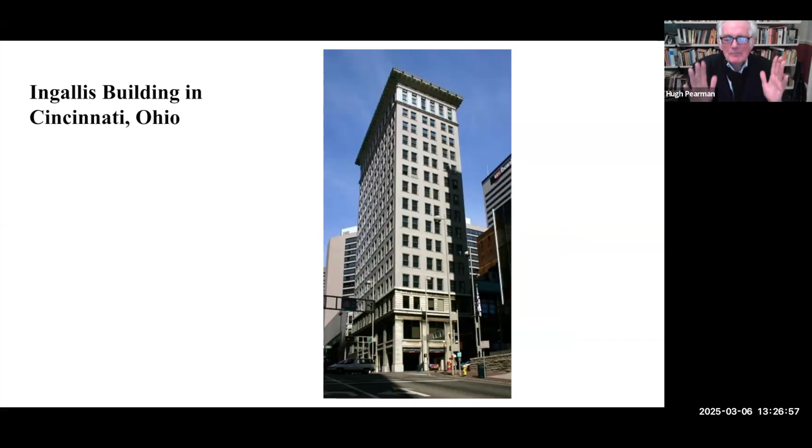It is mass concrete poured over, this would be steel, probably steel at this point. It should be at this date. So mass concrete, 21 semicircular spans, each 50 feet wide. The whole structure stretches 416 yards.

Concrete was used here because that was the only really available building material. The local stone was too hard to use. So this was a choice of material based on the economics and the nature of the site where this thing was being formed. What's interesting about this concrete is that it's poured, mixed with an aggregate, into a timber formwork, resulting in a material strong in compression, but not strong in tension. So I'll come on to that in a moment.

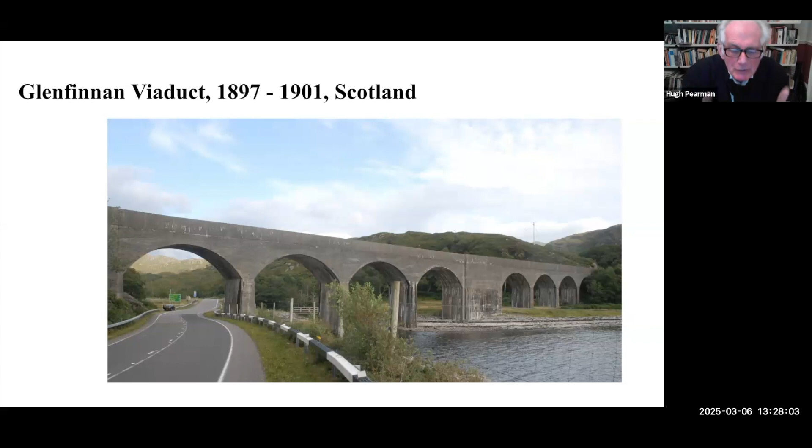So now let's think. The relation between materials and means of construction and design was a balancing act. The aim was to achieve speed and economy of construction and solidity, and of course, the required function of utility. And in bridge design, if not in viaduct design, near the top of the list of demands was almost invariably a maximum width of span between supports.

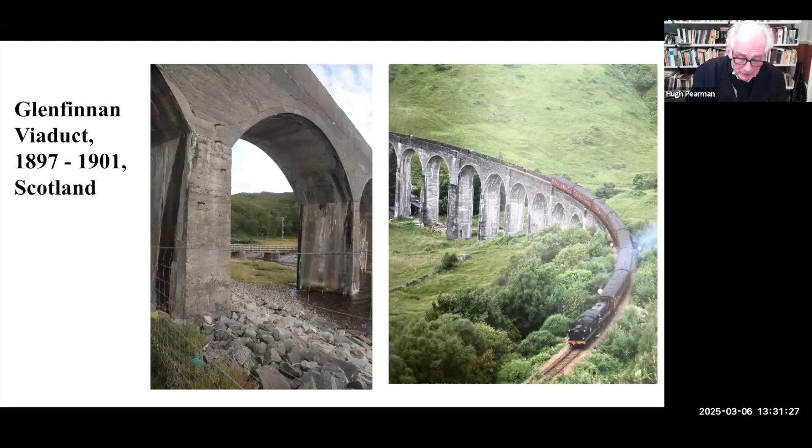But it was soon apparent that it was best if these materials, with their differing structural characteristics, were combined to offer the best of both worlds. Metal reinforced concrete is an expression of this approach, I suppose, isn't it? As is Brunel's use of brick in the Maidenhead Bridge. Brick is a material strong in compression, but given additional strength by Brunel through well-calculated design. So the bridge's span possessed a scale usually only achieved by the use of material with great tensile strength, like

wrought iron ribs. Another good example of the combination of materials with different structural characteristics is the Palm House in Kew Gardens in West London. It represents the emergence of wrought iron as a significant architectural material. The Palm House was built between 1844 and 1848 with the initial design by architect Decimus Burton, but ironmaster Richard Turner was the primary creative force.

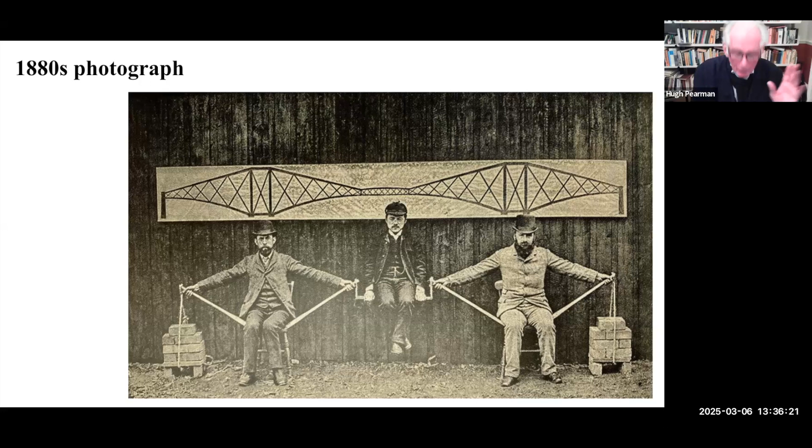Four years later, Sullivan expressed the essence of this aesthetic theory. I quote him again: "It is the pervading law of all things that form ever follows function. This is the law." So here is the simple truth. When form faithfully follows function, a powerful beauty is achieved. Arguably, this explains the visual power of such great bridges as that Firth of Forth, the old moral analogy between truth and beauty.

An applied or superficial ornament, when it does not relate to structure or materials, becomes irrelevant. This theory was well established. A.W.N. Pugin's aphorism of the 1840s, coined when he was promoting Gothic or pointed architecture, is appropriate. As Pugin wrote, all ornament should consist of enrichment of the essential construction of a building. Ornament that was harmoniously conceived and well considered could be beautiful when it was part of the surface or substance that receives it rather than looking stuck on. This gets to the essence of the aesthetics of good bridge design.

Now, into the brief case studies. Iron Bridge in Shropshire, on the border of England and Wales, crosses the River Severn. Started in 1777, opened in 1781, the first major bridge in the world made using cast iron as a structural material. Designed by an architect called Thomas Pritchard, constructed by ironmaster Abraham Darby III. Longest span, you see here, 100 feet.

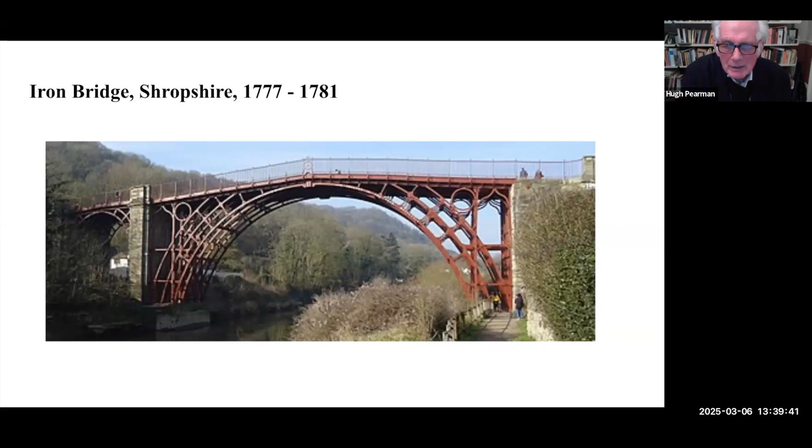The interlocking rings are interesting. You look at the center section. They make the trusses well. They connect the five arches to make it a truss arch bridge. So loads are being transferred one to the other. And Pritchard and Darby, of course, knew that cast iron works best in compression. So the structure is designed as far as possible to transmit loads vertically. So individual components are in compression.

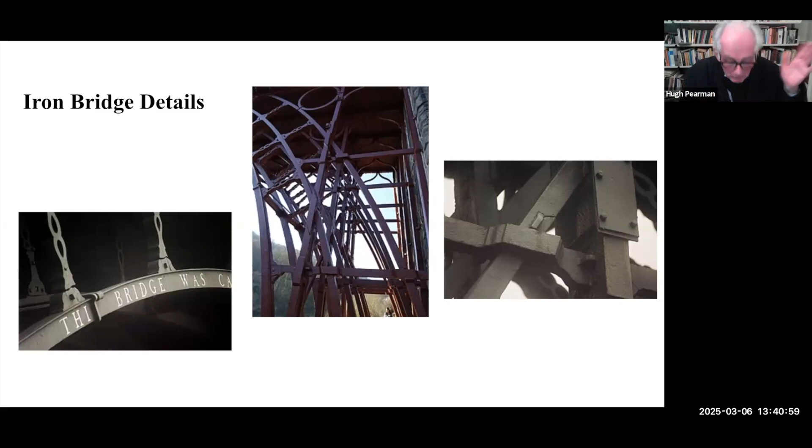place. So it's a component structure, not mass-produced components, because they're mass-produced in a sense, but then they're tailored to the site, delivered to site, and produced, raised into position, wedged together by using these carpentry techniques and so on and so forth. Really very, very interesting.

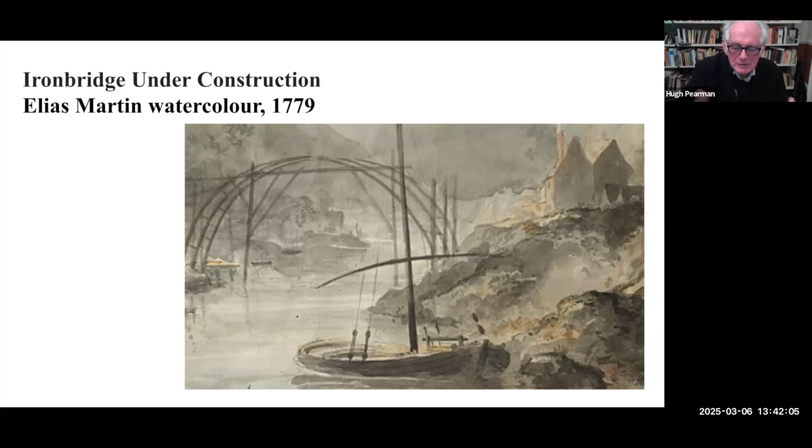So the next image is Southwark Bridge, the City of London. An astonishing bridge as a private toll bridge. Interesting how the Thames was crossed. This is right connecting the ancient City of London on the north bank with the south bank here. We're on the south bank looking towards the city churches.

A private toll bridge. It was a speculation. It was a business venture. You build a bridge and then try and make money by charging people to cross it. That's another whole fascinating story. It didn't really ever work quite well. These bridges were often quite deserted because people would choose other bridges that were often free to cross. Never mind.

An act of Parliament in 1811 gave the developers power to build this bridge, constructed 1814 to 1819, designed by the great John Rennie, one of the great engineer architects in Britain operating in the early 19th century. Had 3 spans of cast iron rising from granite piers.

So, as I mentioned before, spans are important, wide spans. These are the widest spans ever achieved with cast iron, as it happens. So he crossed the Thames and the roads each side in 3 spans. Only 2 piers were needed. That was a big deal at the time.

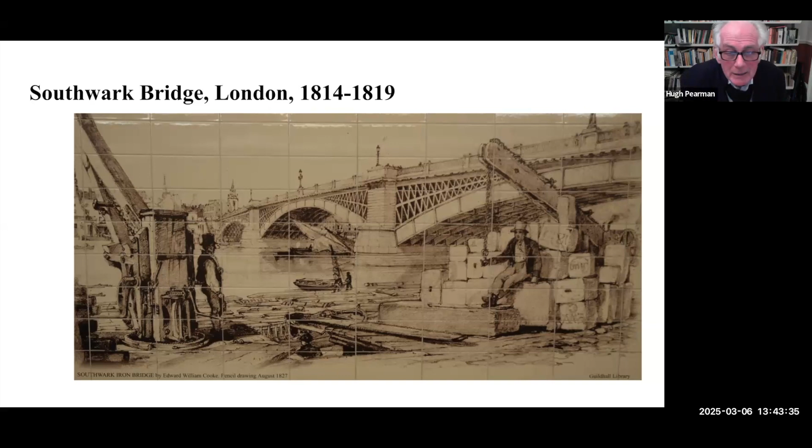And the spans worked. Cast iron, as I say, is strong in compression, but these obviously have a lot of horizontal loads. But it was well calculated. It did not fail. The bridge lasted for 100 years. Its narrow width proved its undoing in the end; there were no structural failures. So a really, really interesting example of a successful cast iron bridge. They were not all successful.

As I mentioned before, there were these epoch-making calamities. But being the 19th century and engineers being robust people, they didn't collapse. Generally, they learned from the disasters and improved their designs. Here we see the Dee Bridge disaster illustrated in a publication in the mid-1840s.

It was in Cheshire, designed by Robert Stephenson, one of the great heroes of the 19th century railway age. His father, George Stephenson, had been a pioneer of the design of locomotives. In the 1840s, his son was one of the big figures in the industrial age, particularly in bridge design and in railway design generally. But Stephenson did not, it seems, fully grasp the structural limitations of cast iron. It was a new material, and one can understand that.

This bridge, a railway bridge, obviously, you see from the debris it was carrying a railway when this disaster took place, railway carriages. It was made from cast iron girders of I section profile, so like the capital letter I, with the larger flange at the bottom to support the timber sleepers on which the track was placed. A nice idea, designing this I section, so it has a double function, carries the spans and also supports the decking for the tracks.

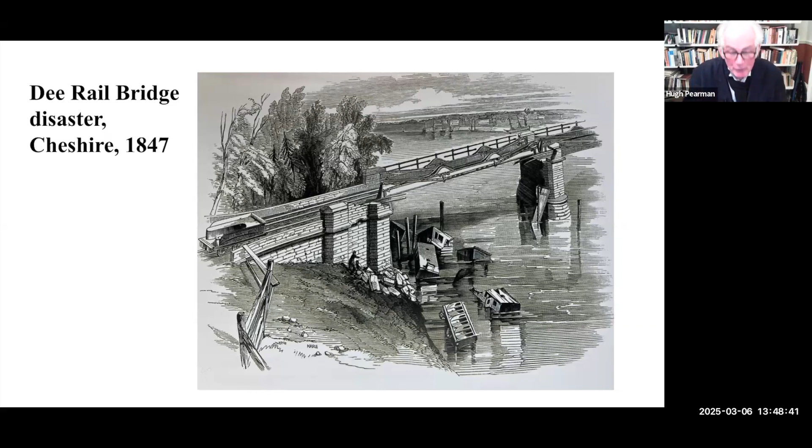While the reputation of Robert Stephenson was being severely challenged by the partial and fatal collapse of the Dee Bridge, he was working on the construction of the High Level Bridge in Newcastle that also made much use of cast iron. Design work had got underway in 1845. It must have been 1847, a highly stressful time for all involved. Cast iron under the microscope seemed to have failed, partly due to the design of the engineer of this bridge, Stephenson. What was to be done?

The bridge is sensational, by the way, the High Level Bridge in Newcastle. Cities of bridges. New York's a city of bridges. Newcastle is a city of bridges. You travel from south to north and north to south over the Tyne through the centre of Newcastle. You're given a display of the most sensational 19th and 20th century bridges in a row, all telling different stories. This bridge is a two-tier bridge, so it's vehicles and pedestrians on the lower level, on the top trains.

This two-tier bridge becomes a standard solution. Several examples, of course, in New York, they're much later. The Washington Bridge is the 1920s, I think. But here is this principle. High level because the railway comes in at a higher level than the surrounding streets. So these massive piers are built and the trains sail through the city.

The promoter of this bridge was a man called George Hudson, the railway king, an amazing character. Eventually became bankrupt and revealed to be a fraud, but that's again another story. It was to be the engineering showpiece of the route Hudson was promoting, connecting London and Edinburgh. Total length of 1,337 feet and rose 120 feet above high water level on the Tyne.

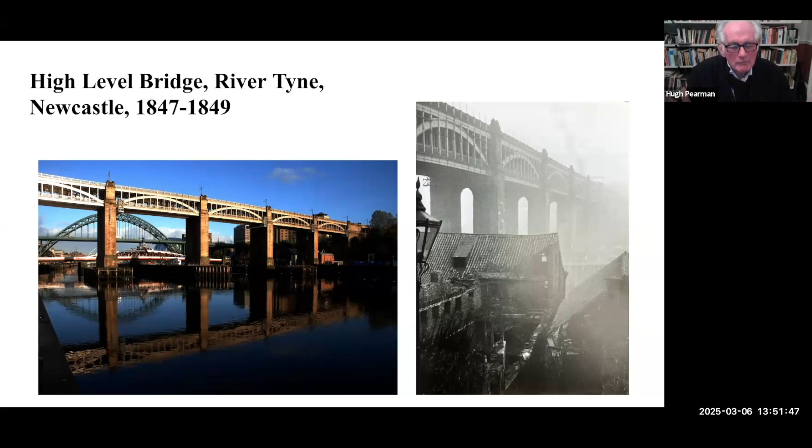So that is simply because the arches are very strong, but they have a lateral push outwards, and they could topple the piers, but the wrought iron tie bar anchors the ends of the arches and means they do not press outwards. And cast iron is okay here because the weight of the trains above the crown of the arch means it's operating in compression.

This is where you see one of the examples. So the bowstring arch, there's the arch, cast iron, in compression, the weight of the trains on the top, and you can't see it, but the ends of the arch are tied. So stop it spreading and stop it exerting outward thrust on the masonry piers each side.

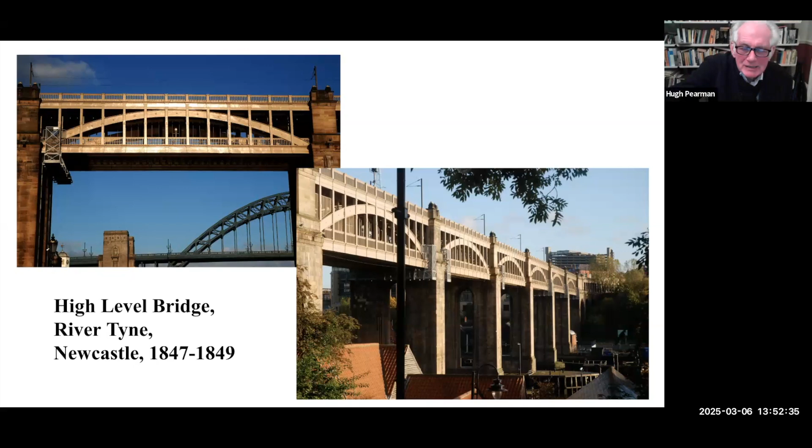Well, it's a beautiful thing to experience, to visit. If you ever in England have time on your hands, go to Newcastle. You walk through this tremendous wonderland of mid-19th century engineering. You see some of the details. I think the next image gives you a little hint of what you see.

So the lower, on the left-hand side, you're walking along the pedestrian route and the vehicle route. Above you are the trains. All that is cast iron. These wonderful X-frames, again cast iron, and on the right is one of the arches, again cast iron, but with these ends tied with wrought iron. The bridge opened in 1849, and all was well.

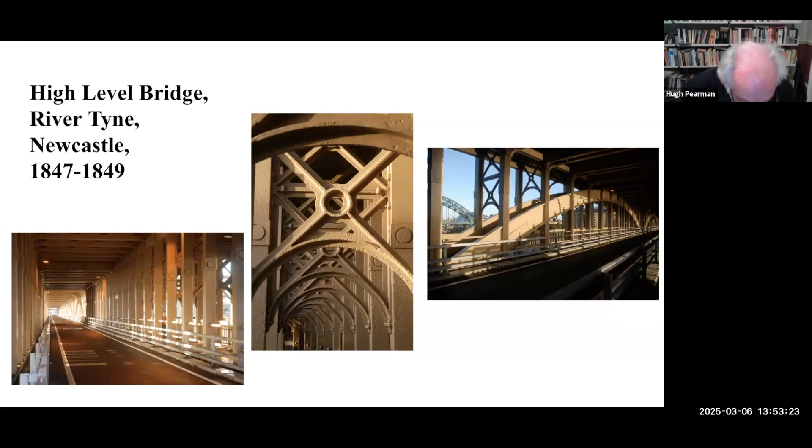The lessons had been learned from the Dee Bridge, and this design worked. Combination of cast iron and wrought iron, and it carried the loads and continues to this day. Interestingly, the next bridge, the Britannia Railway Bridge, crosses the Menai in North Wales. Fascinating, Menai, North Wales, also by Robert Stephenson, but with the engineer of great genius called William Fairbairn. April 1846, the foundation was laid. So that's before the Newcastle Bridge was opened.

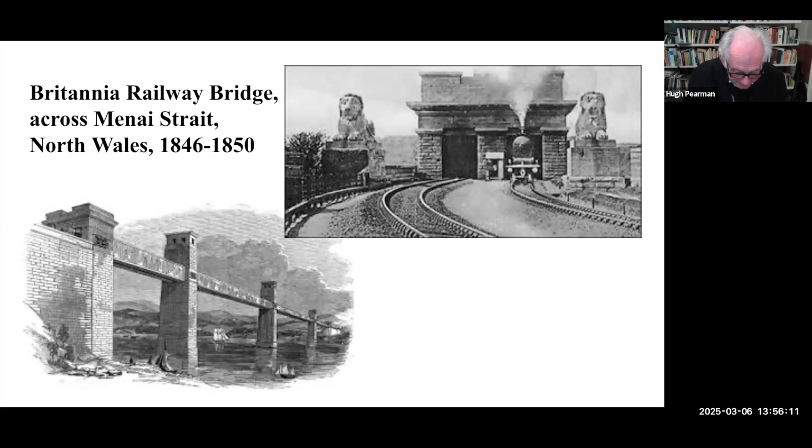Interestingly, if you can maybe show the next image, you see this tube going across. So one of the problems identified from the start was that the top element of these wrought iron tubes, like these covered boxes, could buckle under its own weight. And so Fairbairn had to come up with a solution, as inspired engineers do. He made a design of corrugated tubes to support the top element of what I call the tube, this square section tunnel. And that worked.

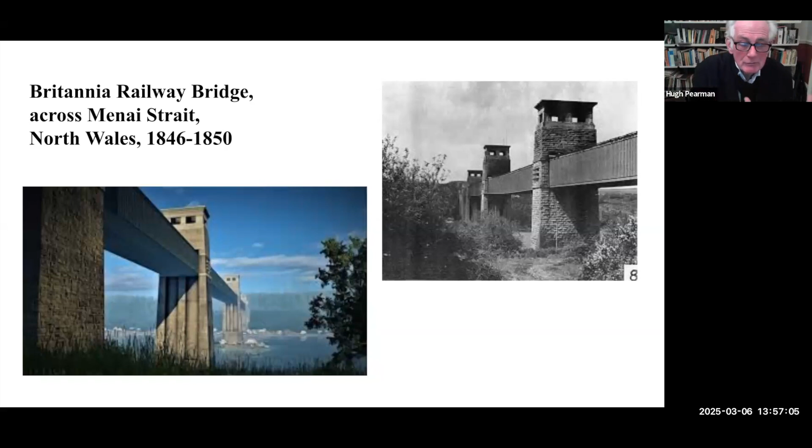In 1850, the bridge was complete, opened in March 1850. And in broad terms, it marks the great shift in major bridge design from cast iron to wrought iron. So it's one of the great bridges of the world. It captures a transitional moment in bridge design. And I'll say why in a moment.

This is the Royal Albert Bridge, Saltash, Cornwall, on the border between Cornwall and Devon in the southwest of Britain, over the River Tamar, for the Great Western Railway, which was, in a sense, Isambard Kingdom Brunel's great opportunity to demonstrate his ability and the potential of railways.

This railway system went from London Paddington to Bristol, and further west to Cornwall, and also from Bristol, the notion of having these great iron-built ships taking passengers from Bristol to New York. So coal-fired steam and metal created an international transport system. This is beyond Bristol, going west, but part of the Great Western Railway. Opened in 1859, Isambard Kingdom Brunel.

Just look at it. It is an amazing object, is it not? At high level again, the spans are wide. That was the idea. Each span is 455 feet, so not many piers are needed. The piers were a huge problem constructing them.

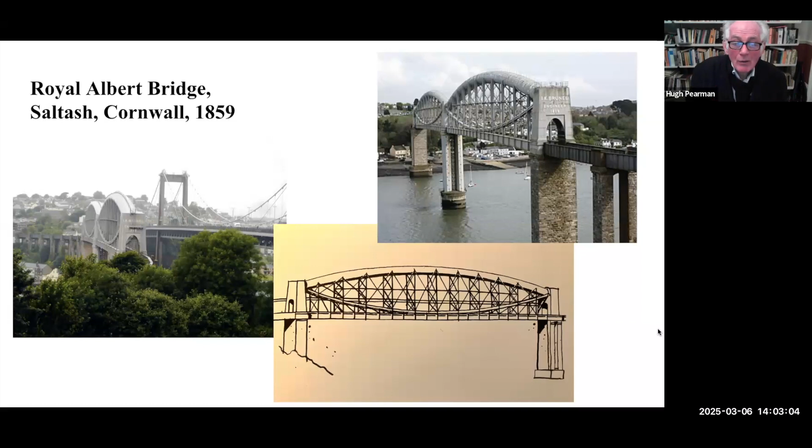Now, talking about the cutting edge and living on the edge, and the lessons being learned and calamities often being the consequence of the speed of the construction process, I have to mention the Tay Bridge. Despite the collapse of the Dee Bridge in the 1840s, still lessons to learn. This is an amazing story. This bridge combined, you see, spans of different types, designed by a chap called Sir Thomas Bouch.

Construction started in 1871. He used wrought iron lattice girders and cross bracing combined with cast iron columns. Fair enough. Cast iron for the columns, good in compression. It stretched nearly 2 miles. It was the longest bridge in the world at the time. And the engineer, Bouch, was much celebrated. Indeed, he was knighted by Queen Victoria in June 1879 when she crossed the bridge. It was, again, one of the wonders of the world, displaying British, Scottish prowess in engineering.

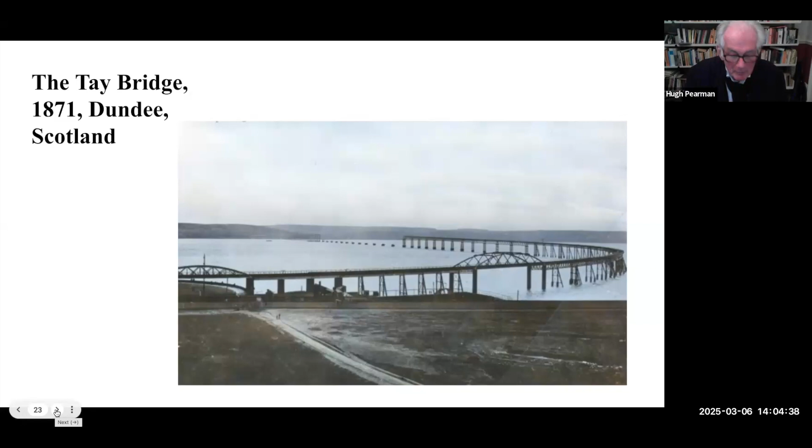That was in June. In December 1879, calamity. During a violent gale, and while a train was passing over, the bridge suffered a partial collapse. You can see the missing portion of the bridge. This is documenting the consequence of the calamity a few months after it happened. This must be early in 1880, this photograph. Partial collapse. Locomotive and carriages fell into the freezing water. At least 60 people are known to have died.

At the time, it was thought to be far more. 90 people were assumed to have died. People had got on or off. No one quite knew who was on it. And so the death toll was thought to be as high as 90. Again, national lamentation, national horror. Images are published there. People fell into the freezing water. The photograph on the right is very solemn, isn't it? Just after the collapse, the portion of the collapsed bridge lying in the now still waters.

It transpired that Bouch had made no explicit allowance for wind loading in the design of the bridge. Again, lessons to be learned. Nor had he considered the extra surface area offered to the wind by the presence of a train on the bridge. There are other flaws in detailed design, in maintenance, and in quality control of iron castings, all of which were, at least in part, the engineer's responsibility. Indeed, he died less than a year after the disaster, his reputation, of course, ruined.

The Court of Inquiry concluded in its report: the fall of the bridge was occasioned by the insufficiency of the cross bracing and its fastenings to sustain the force of the gale. It indicated that if the piers, and in particular wind bracing, had been properly constructed and maintained, the bridge could have withstood the storm that night, albeit with a low factor of safety. So a failure of design and, interestingly, of maintenance and quality control. Obviously, speed and money had been an issue.

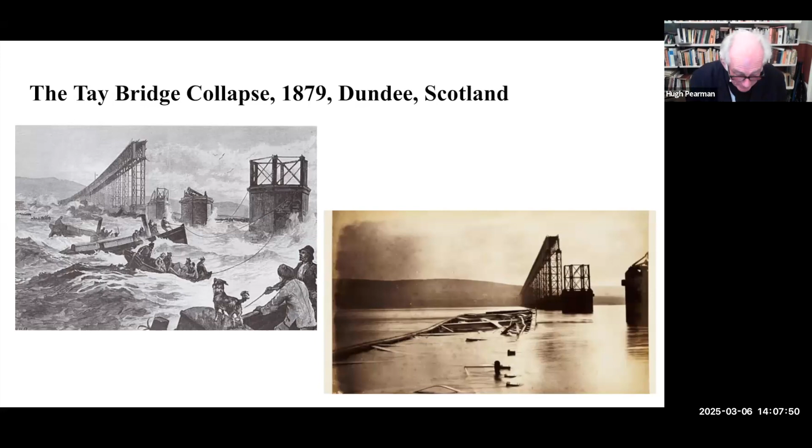Well, he was right about that. It is remembered. Now, my last bridge is a final note, I suppose, on bridge design that went against the evolving principles and tastes of bridge design at the time in the 1880s. If you can define those, looking at, say, the Forth Bridge, the emerging conviction that materials and means of construction should be honestly expressed, and that superficial and history-inspired ornament should be greatly reduced. I mean, you see it at Brunel's Saltash Bridge, of course, the Forth Railway Bridge.

It also raised other issues about the meaning of bridges. You know, bridges are fascinating because they are expressions of man's ability to tame nature by using the laws of nature, physics, by creating objects that seem to defy the forces of nature, and often in themselves become almost elements of natural forces, a man-made nature in the face of nature. Bridges are fascinating in their complexities, in the emotions they arouse, the fact they are bridges between things, between places, between ideas, and often in that respect, they create memorable images and give a sense of pride to people. So I'll get on to that a little bit in a moment about this bridge.

So Tower Bridge. Okay, in the late 19th century, the City of London, remember the City of London? From Roman times, you could say it was founded perhaps before that, 2,000 years old. It sits on the banks of the Thames where the Romans created their great trading city. They invaded Britannia in 43 AD. So between the Tower of London, built after the Norman invasion in 1066, east, to, say, St. Paul's Cathedral, roughly in the west, the square mile.

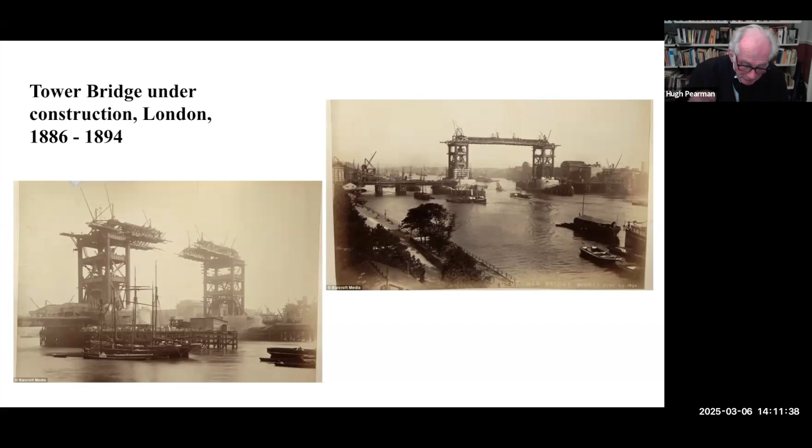The bridge is a combined bascule and suspension bridge. The bascules are the center portion of the bridge that opens like a drawbridge, originally powered hydraulically by steam engines with counterweights that descend into these huge chambers below the towers. The towers are functionally necessary because they provide anchors for the flanking suspension portions of the bridge. You see them each side.

And they also had this gantry at the top, which allowed pedestrians to go across the bridge when the road itself was raised. As these images are showing you, it's a fascinating construction. The towers are steel framed. They're modern steel frames, like the towers being built in Chicago and New York by people like Burnham and Root in the 1890s. Steel is now the material, a steel frame construction, very modern, very strong, very efficient steel frame construction,

but it had to be decorated. So you're going back to the earlier concept. And here the steel frame is not expressed and made glorious as an expression of the modern age and ingenious construction, but it's clad with granite and historic style, which is sort of Tudor Gothic. That is the late Gothic of the, I suppose, 16th century. These pictures are fantastic. You get this kind of emergence of this entirely modern structure. Then it's clad in granite with historic detailing.

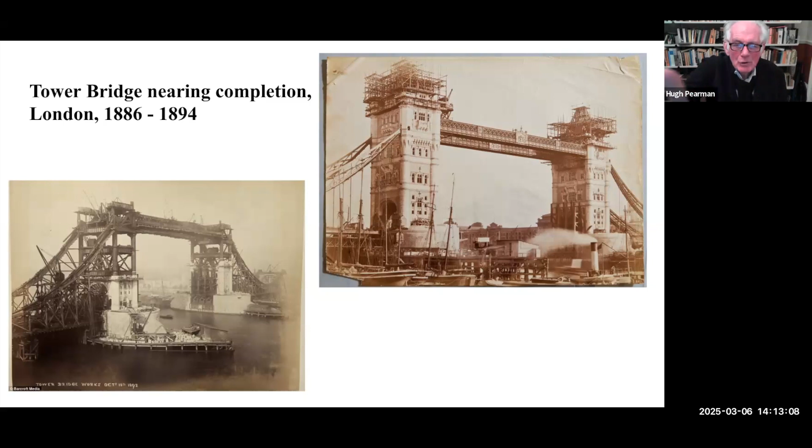If you go to the next image, the working drawings from the time, you see the one on the left inside the staircase? All that's a steel frame, and then literally just clad with historic detail. What's interesting about this bridge is it's artistically odd, perhaps, and retrograde, you may think, but the public loved it, and the public still do. And this gets me on to that point I was making a moment earlier about the meaning and power of bridges.

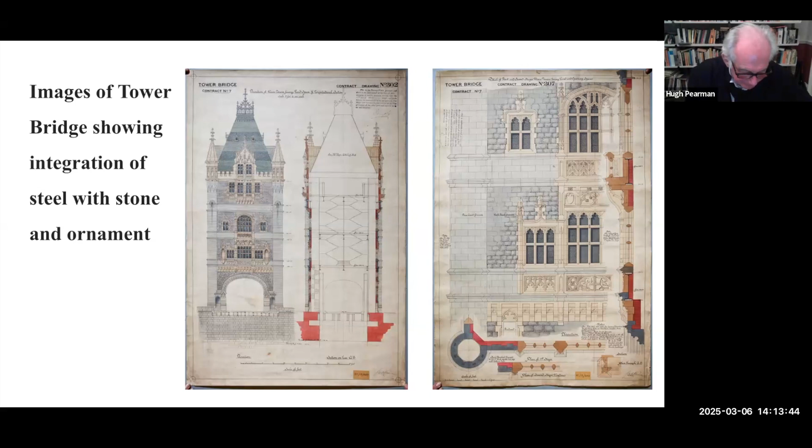Tower Bridge in many ways is the image of London. The Forth Bridge is the image of Scotland. And you will find bridges around the world where things are comparable. They are such glorious and important constructions. They occupy such a powerful place in the imagination of people that they become the symbols of a location.

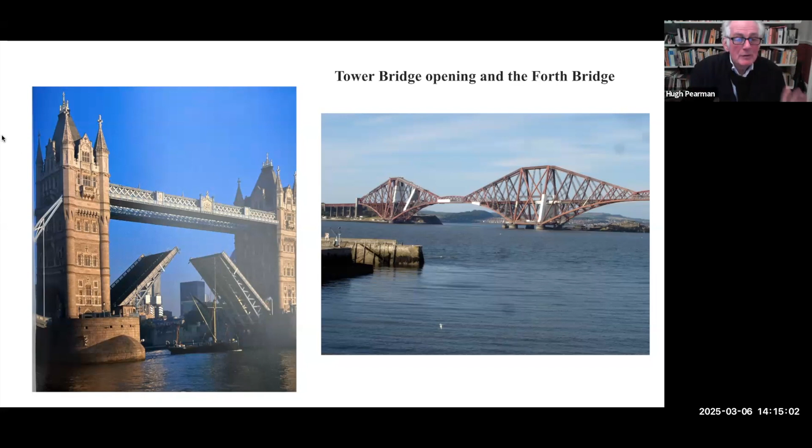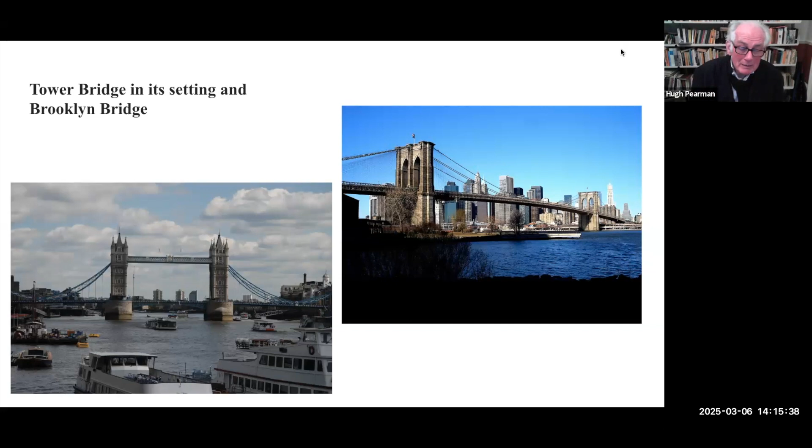The Brooklyn Bridge in New York, many people think that, is an image of the city and was in a way calculated to be that. In the 1870s or 1880s, when it was being completed, it's another fantastic story. It was to be the epitome of the spirit of the place. So you have Tower Bridge, Brooklyn Bridge, Firth of Forth. These are great bridges, all very different, but they remind us of the power of the bridge as an engineered construction and as an image and as a symbol and as an object that gives pride and identity to different generations of people. Thank you very much.

This is really great. One of the things that struck me about that, particularly when you're talking about, from Louis Sullivan onwards, the nude structure. Yes. That's all it needs. That is expression enough. When I look at some of those bridges, I think that resurfaced in architecture, particularly in the UK, particularly from the 1970s.

And could you talk a bit about that? How that engineering tradition then later, well over a century later, almost 150 years later, started to inspire the high-tech stuff. The high-tech style, yes. Well, that's a very interesting one, isn't it? When technology becomes the driving force, and also the transference of technology.

If you think about Beaubourg and Lloyd's earlier structures, literally taking technologies from other production systems and applying them to architecture. But then there's another layer of that, isn't there? The kind of almost rebellious, the Dadaist thing of compositions using components like a collage.